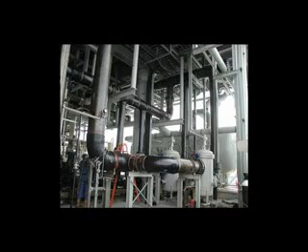My name is Elliot and I'm going to show you how to make pipes for industrial purposes, factories, machines, you name it. The problem I had was making a pipe that turned a perfect 90 degrees, so I've come up with a few methods and I hope they help you out.

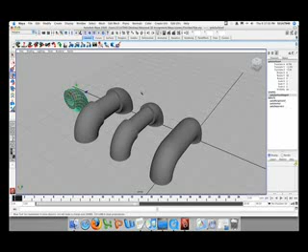The first one is just NURBS surfaces. The second one is one continuous poly with closed ends. The third one is separate pieces that can be moved around and animated and whatnot. And the last one is significantly different to the others in the way it's made. Anyway, the first one I'm going to show you is the one with all the separate pieces.

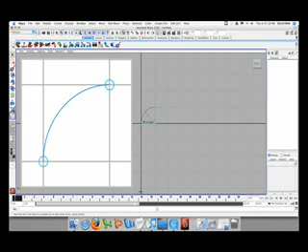So just start a new scene, jump into your side view and go to Create, Arc Tools, 2-point circular arc tool. What we want to do is make sure snapping's on, grid snapping, and snap it from the right corner down to the bottom left hand corner of one's block. There's a close-up of what it looks like. The middle point here will just adjust the arc, this one will flip the arc.

But go ahead and hit enter and just rotate around in your perspective mode and you'll see that we've gone there. Next thing we want to do is create NURBS primitives, make sure interactive creation's off and hit circle and reset the settings, and where it says radius go 0.65. Hit create and you've made a circle in the middle of the stage where the curve is.

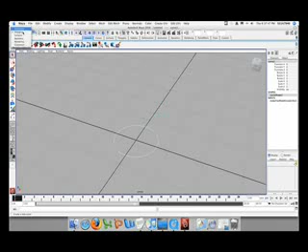Next thing, select the circle and the curve and under your surfaces menu go to surfaces and extrude. Hit 5 on your keyboard to enable the shader, and we've made a tube. Pretty simple. Next thing we want to do is go modify, duplicate, and move this aside so we can make the pipe in the middle. We want to flip it around, so just -1 in the Z axis, which will make them face each other.

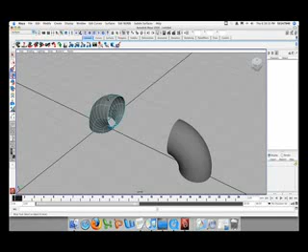Next thing we want to do is select the original pipe, right click isoparm and then click the outer edge isoparm. Same thing with the duplicate, shift click, isoparm, shift click, and then go to surfaces, loft, and we've made the pipe in the middle. Pretty simple. Next we want to select it all and go edit, delete by type, and delete all the history. This is so we can move all the pieces individually.

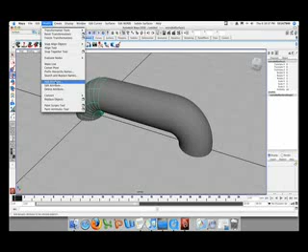Next we want to select the original pipe, go modify, convert, NURBS to polys, and the options. Just going to reset the tools here. We want type quads, and tessellation method general, and the number of U and V is how many parts it's going to be split up into. We're going to use 30 and hit tessellate. It might look a bit weird, just move it aside because it's been duplicated and sitting on top. And there you go, you've got a poly pipe.

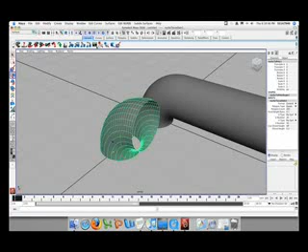Next thing we want to do is give this some thickness. So under our polys menu, we're going to go to edit mesh and extrude, and drag it in the Z until you get the thickness you want. I've got snapping on, give me a sec. I'm just going to fix this up. I want to make it a little bit smaller. There we go.

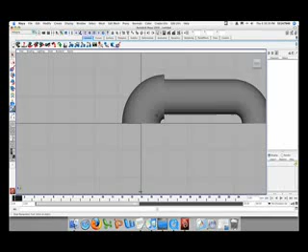And what you'll notice if you go into your side view, go to object mode and hit 5 on the keyboard for the shader, the edges aren't actually in line, they're a little bit out. To fix this is real simple. Select the object, go to your vertices and select all the vertices on that edge, and we want to scale them in the Y to the middle. This will even out all the vertices.

Next, make sure grid snapping's on and snap it back down to the grid because it is a little bit out. It might be a bit hard to see, but it will be a little bit out. We want to do the exact same thing for the other side. Select all the vertices, scale it into the middle. This will straighten them all up, and then we grid snap it so it's in line because it is just a little bit out.

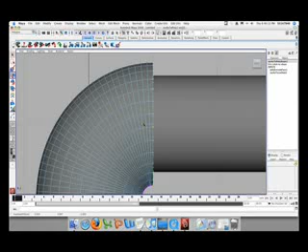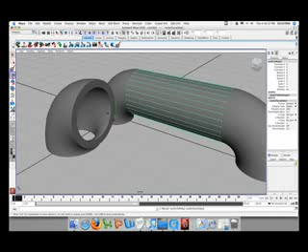Next thing we want to do is jump into our perspective mode, and you'll see that we've made a pipe. Very simple, very easy. Next, we want to grab the middle pipe, go modify, convert NURBS to polys options, and change the V to 2. This gives it 2 spans. Next, with grid snapping on, we move it aside to where the other pipe was.

We want to duplicate this pipe, just Apple D, or modify duplicate, and flip it with -1 in the Z. And there you go, you've got your pipe in different parts and pieces. Really simple. Now we'll move on to part 2.